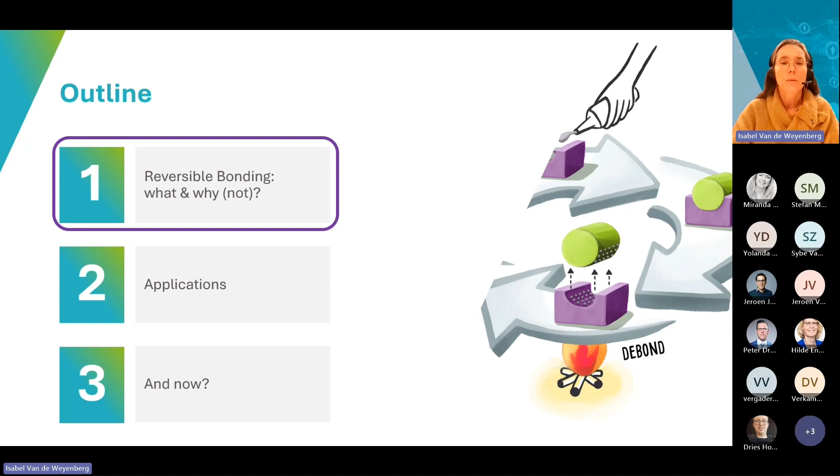So reversible bonding, what is it? First of all, we always assume that we have an adhesive joint which is intact. When there is no trigger active, the joint is still intact. We have a structural adhesive joint. At a certain moment, a trigger will become active and the components, the substrates, will come loose.

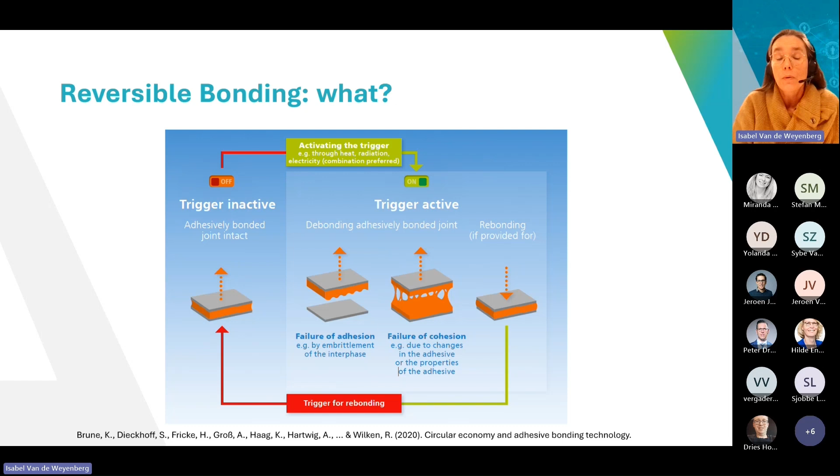Our bond is debonded. This can happen at the interface. It can happen in the adhesive layer. That's not really defined. But important is that the components, the substrates, will not be damaged during debonding. So we can rebond them if we would like to do it afterwards.

And why would we apply reversible bonding? Well, it would make the repair of a product maybe a little bit more easy when you can decompose your product and repair the components. But it's also quite interesting if you can reuse some high value components. For example, at end of life of a product, there might be one or more components inside that still have a high value and that you want to

reassemble again, reuse again. But also during your production process, maybe there is a misalignment, a misassembly, and you want to reuse some of the components. And also don't forget at a real recycling at end of life, it's always good to upgrade your waste stream as much as possible. So if you can go to recycling of individual components, it's much more interesting to do so. So these are just some examples where we could apply reversible bonding.

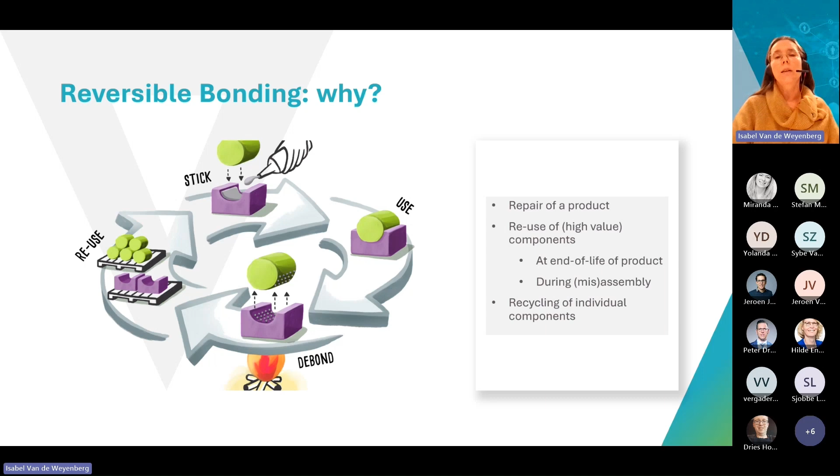But there are challenges, of course, as well to reversible bonding. First of all, from a technical viewpoint, we should be sure that the performance of our adhesive is still good enough from a mechanical, physical, chemical point of view. And also that the trigger will not happen during the lifetime of your part.

From an economical viewpoint, we have an extra cost for implementing this technology, and you have some equipment investments to do, but there will also be a switch cost involved. Your process will change, your adhesive recipe will change, and also really important, your business model. That's not always so clear. Sometimes there are split incentives. Your investment, for example, is done by a production company, but your return on investment, that's something for the recycling company. So this should be really cleared up front and analyzed very well.

And also maybe environmental viewpoint. We always think it's much better to use reversible bonding, but is that the case? That's still a question mark, something interesting to be analyzed.

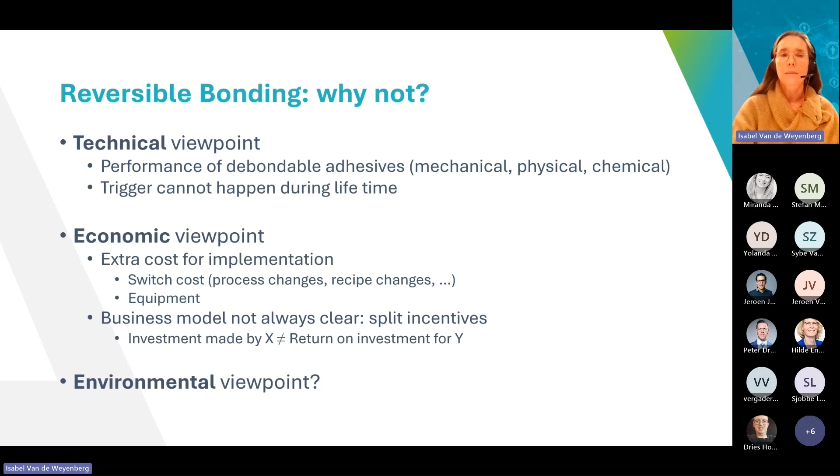So within reversible bonding, everything starts, of course, with a successful debonding. And how can we achieve debonding? Well, we identified three main categories. First of all, we have our mechanical way of working, which is quite straightforward, not so innovative. You just cut your sample or you tear them apart. If that will do the job for you, that's fine, but you have to be sure that your components will not be damaged, of course.

Quite often your part will be a bit more complex, the situation will be a bit more complex, and then your thermal triggers might help. So you apply temperature to degrade your adhesive properties in such a way that you can debond your components easily. And you could also apply electrochemical triggers, for example, electricity or UV light to degrade the adhesive and to debond your components. That's still lower TRL research, smaller scale examples that are existing over there.

Within Flanders Make, we mainly have expertise in the thermal technology. So this is really high TRL research, and we also work with thermal expandable particles, which I will explain on one of the following slides.

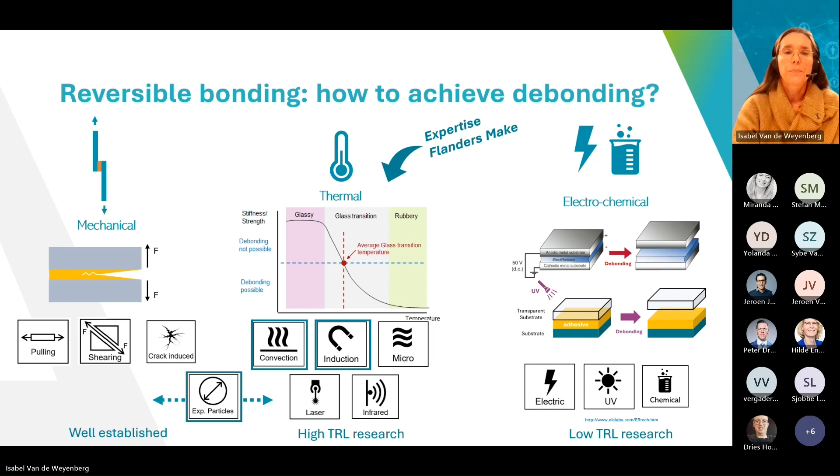So when we look at some real-life applications, some demonstrators, first of all, I want to explain a little bit the technologies that we will use. First of all, the induction technology. With an induction technology, we apply an electromagnetic field onto our components, onto our part. And if your substrate materials are not conductive, we can apply ferromagnetic particles to mix in our adhesive.

And under an electromagnetic field, this adhesive will heat up in this way, will cure, so your bond becomes intact. It can also happen very fast. I will show this later on. And in the same way, we apply again an induction electromagnetic field. We can reheat our samples in such a way that we reach the glass transition temperature and we can easily debond our parts again.

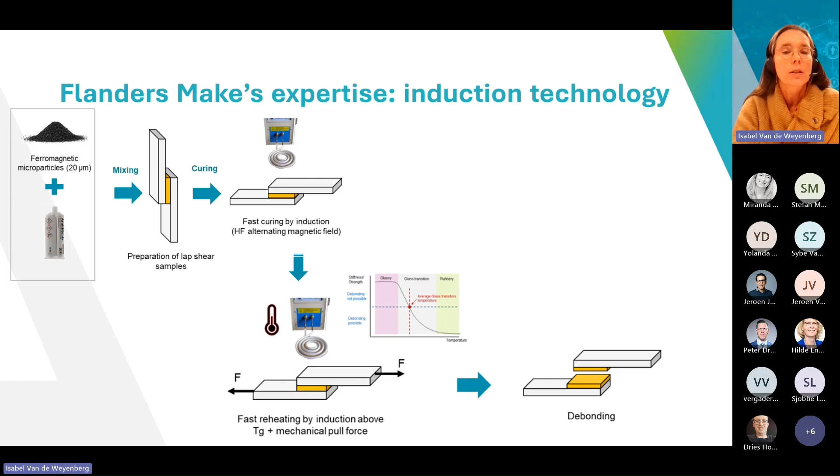Like I said, we can enable fast curing with this induction technology, which is of course a really nice extra. So it's not only about debonding, but also about fast bonding. What you see here on this graph, the vertical axis is a measure of the lap shear strength, which is also indicating the curing degree.

The blue bars are a commercial adhesive mixed with about 16.7% of these ferromagnetic particles, and the green bars are mixed with 30% particles. On the left-hand side, you see a standard oven curing. So the parts need to be cured in an oven for 3 hours at 80 degrees, and you can achieve a similar strength with only 15 minutes under induction heating. So you can increase your speed from 3 hours to 15 minutes.

And when we look at the debonding possibilities, this is now another sample than in the first graph. When we have a fully cured sample, if we put it in an induction field for only 2 minutes, you see that you can decrease the strength below 1 megapascal, and that's the strength with which you can just tear your parts apart with your bare hands.

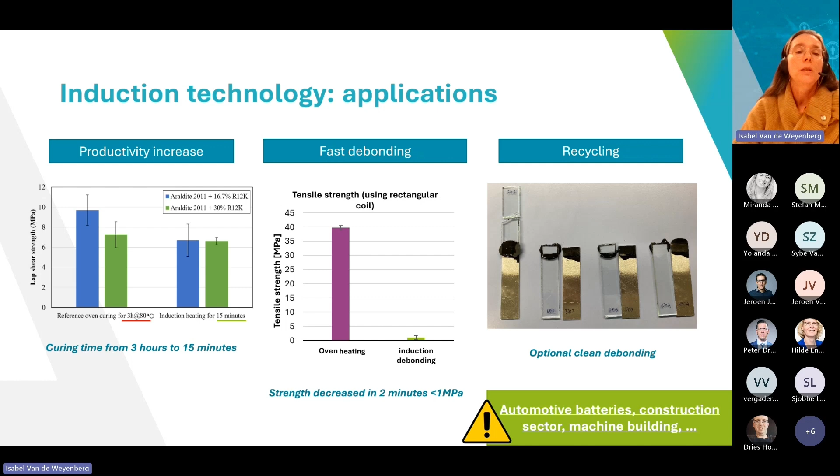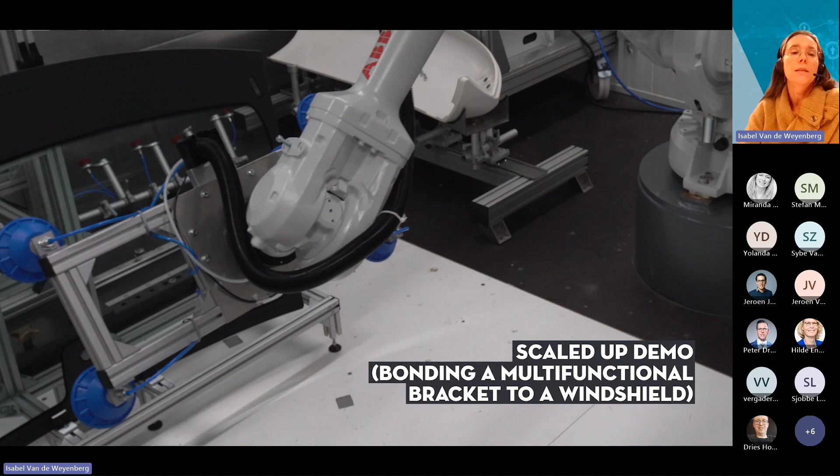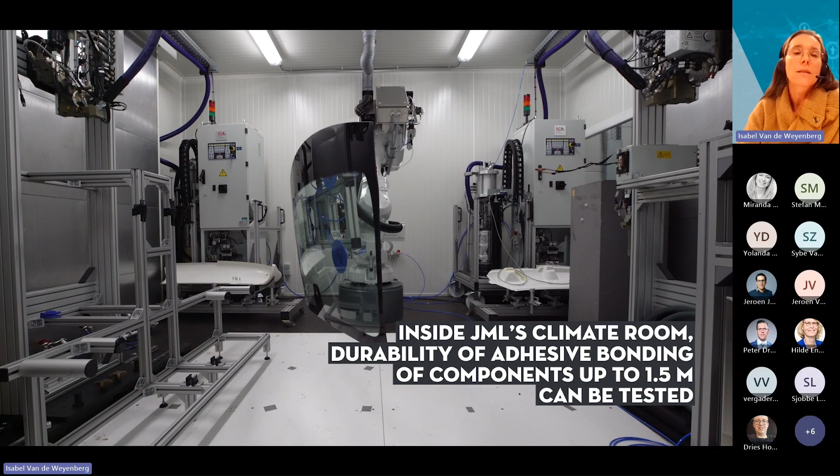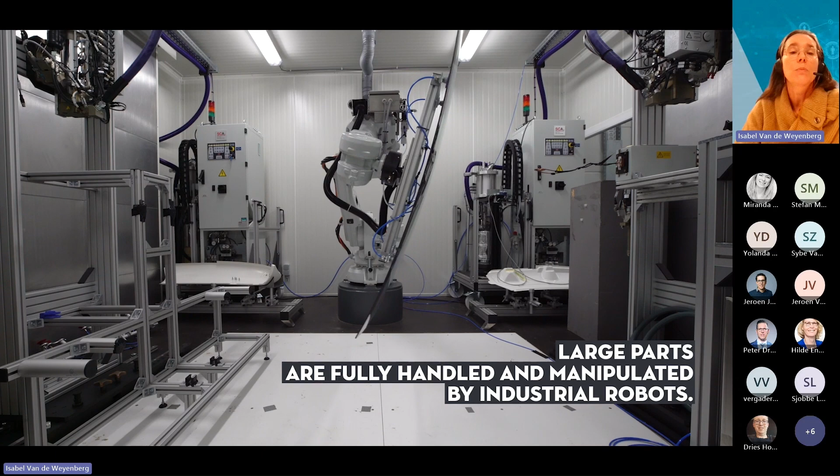And I have a short movie illustrating the fast curing possibilities here. What you see here is a robot that's handling a car windshield. On these windshields, nowadays sensors are being applied, for example, rain sensors. The robot is offering the windshield to a manual operator in this case, but this could also be another robot, of course, that will be applying the glue. So here you will see manual application of the glue mixed with these ferromagnetic particles.

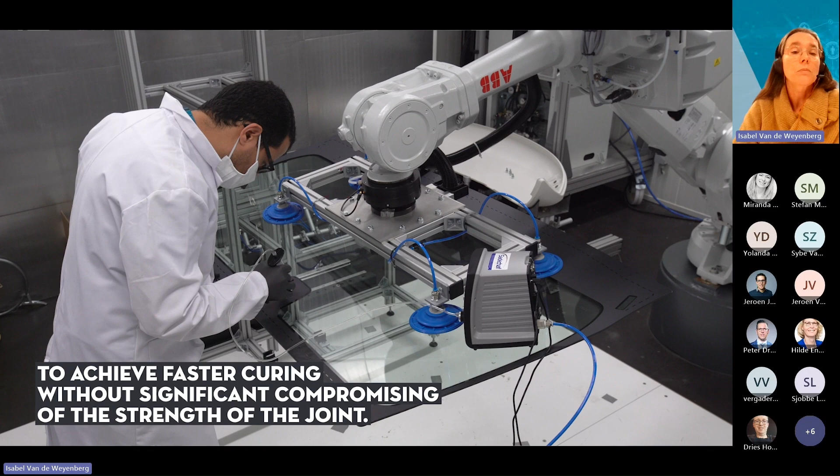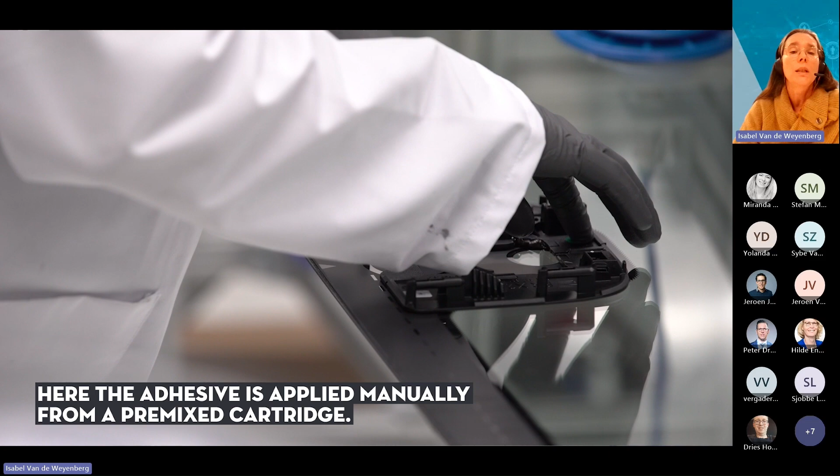A nice thing of this example is that in real life, these windshields are quite often cured for several hours in a separate stock location. So you need to have enough surface to stock your windshields during production. With this technology, you will see that just within a couple of minutes, you can already secure your sensor. You can bond your sensor to your windshield and your production process will not be interrupted.

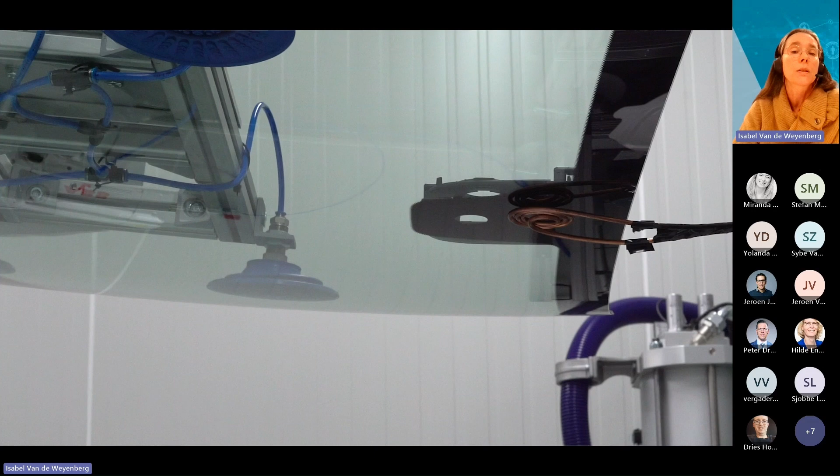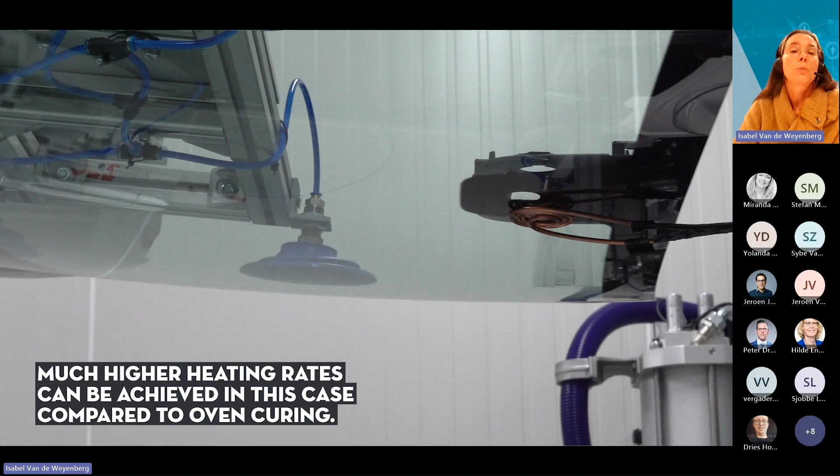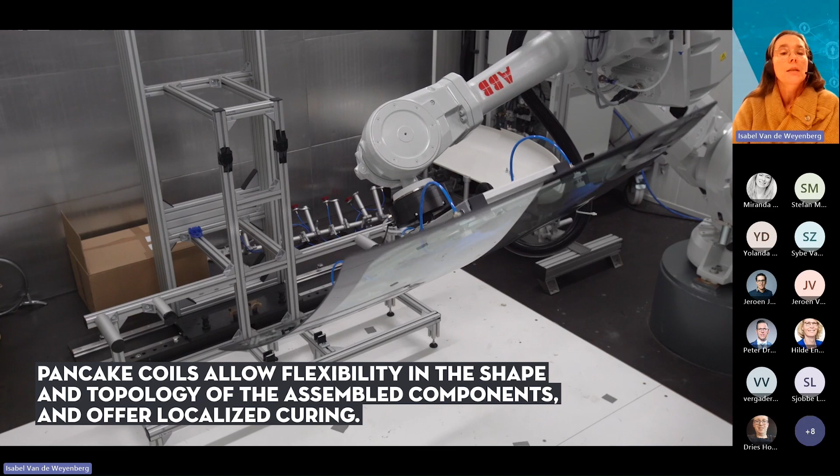So what you see here is a pancake-shaped coil that's hovering over the part that needs to be bonded. And after really a short time, we can put the windshield in a straight position again. So you see that you can speed up your production process very much.

Another technology is the technology of the thermally expandable particles. These particles contain liquid hydrocarbon. At a certain temperature, this liquid will change into gas and the particle will really expand. That's something that you see here on these photographs as well. If you mix these particles in your adhesive, your adhesive will start to swell and will push apart your adherends and they will come loose.

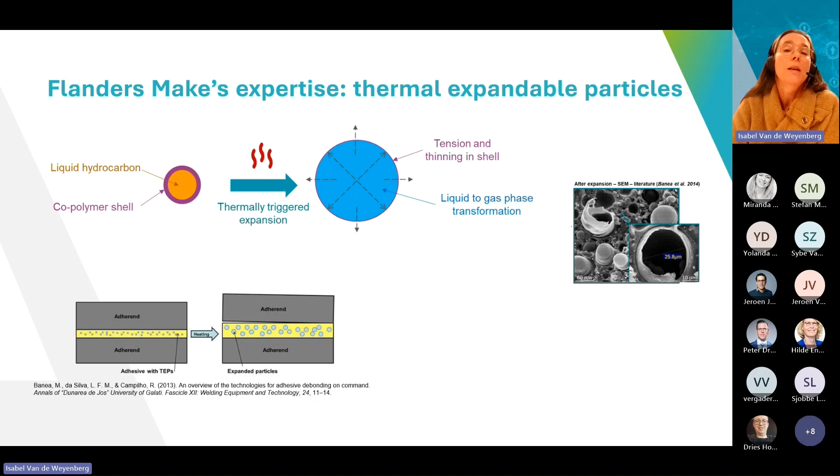In the next slide, you see also a nice example. We have a spherical glass lens, which is mounted on an aluminum carrier ring. When we put the complete part in an oven at 120 degrees for about 10 minutes, this is what's happening. We see the foaming of the adhesive. I will stop the image now. You see the adhesive is really foamed up.

It's pushing apart the parts, and it's a really brittle and foamy substance, so you can just wipe it off with a cloth. So you don't have to scrape off your adhesive. It's not really fixated to your substrates. It's easy to just clean and wipe off and then prepare the substrates again for rebonding if you want to.

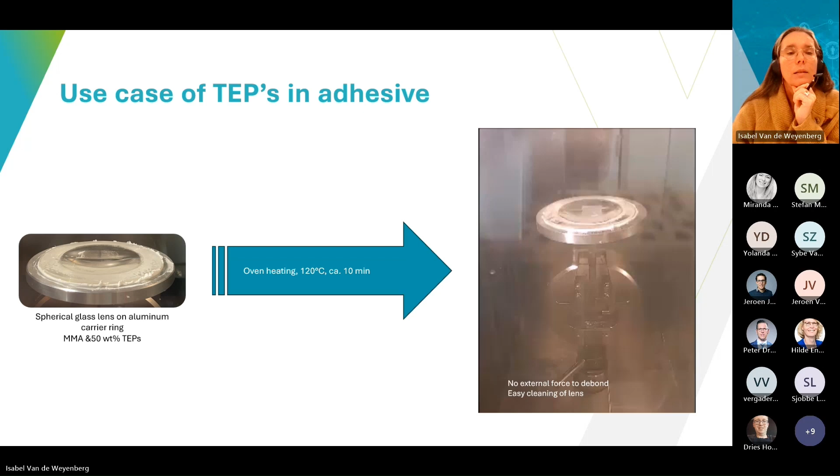Now, we wanted to scale up these examples a bit, and therefore we went to an industrial automotive example. In this case it's part of a bus chassis, but you could also apply it on a sidewall of a trailer or a train carriage, for example, everything where a metal chassis is bonded to a composite side panel.

This was an exercise that we made together with the colleagues of VITO. We took the technical challenge, the colleagues of VITO took the economic and environmental analysis, and we got our materials from VDL Bus Company. In this particular example, we wanted to avoid production waste due to misassembly.

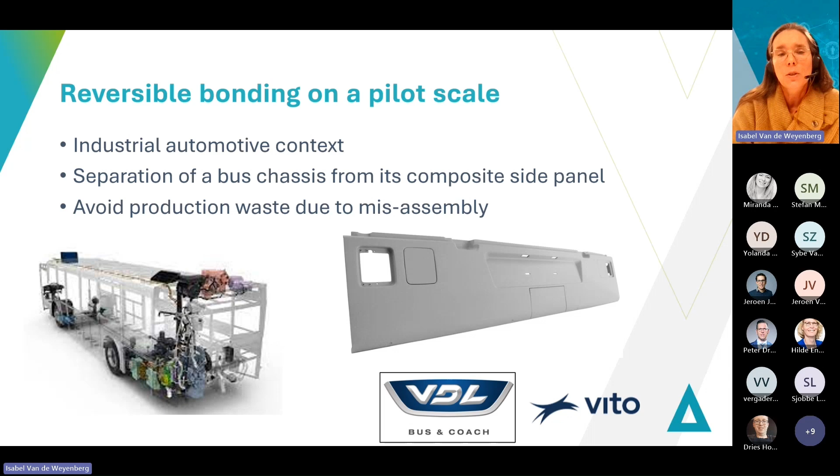You have huge panels that need to be bonded in a production process, and sometimes a misalignment occurs. If you want to debond your components, your composite panel quite often gets damaged. So this is something that we want to avoid by using this reversible bonding technology. First of all, from a technical point of view, we start with a lab scale experiment, and we wanted to obtain debonding through induction heating, because the steel chassis allows us to use induction heating in a very easy way.

And we use some thermal expandable particles in the adhesive layer to make the debonding much easier and more rapid. We have to make sure that the temperature of 140 degrees is not exceeded, because otherwise the composite panel will start to degrade. And also the debonding time should be limited to a maximum of 15 minutes to avoid degradation

of the composite panel. And we've seen that only with 5% of TEPs mixed in adhesive, we could reach a really nice result, which I will show you in the next video. And this 5% will also allow us to work with adhesive viscosity, which is almost normal compared to the normal recipe.

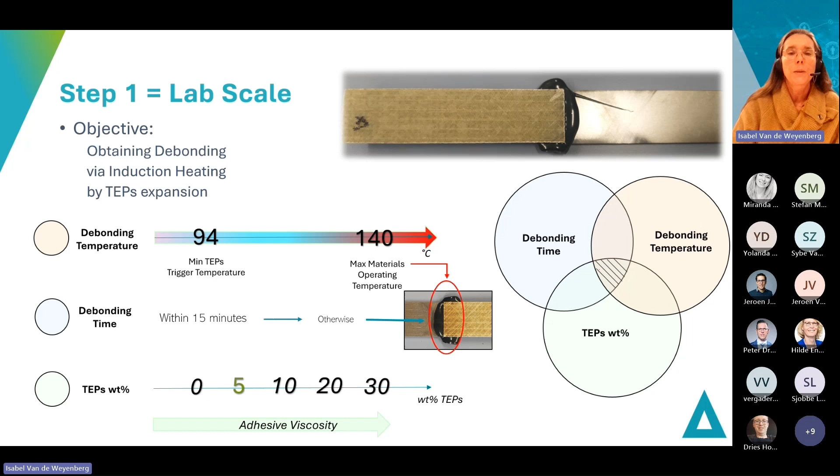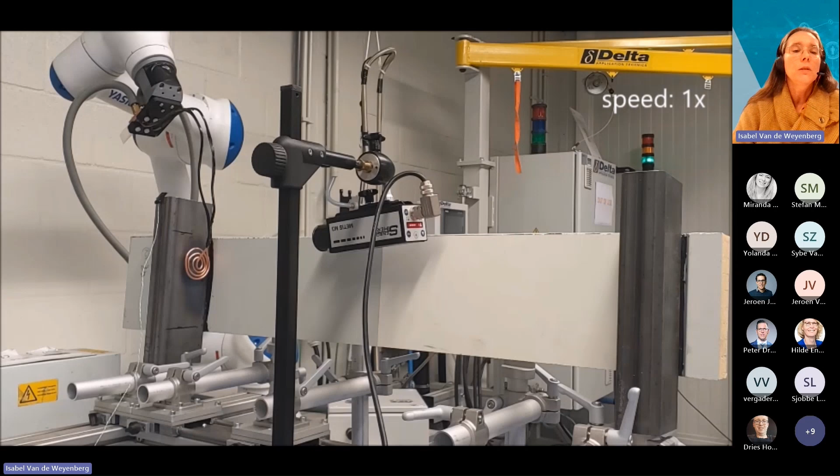You see the induction coil moving. We are speeding it up a little bit, but in a total time of about 10-11 minutes, we will reach just spontaneous debonding. It's also, of course, due to gravity that you will see, voila, the panel will just drop down. So the heat is delivered through the steel chassis towards the adhesive bond line. So from a technical point of view, we managed to show the feasibility of this technology in this example.

But what about economic and environmentally seen? Is it still also feasible and interesting to apply this technology? So if we just from a very logical way of thinking, we say, well, environmentally, we avoid primary production of a composite panel. So it's a positive story. And from an economic point of view, also there, we avoid an extra composite panel to be produced. We have an optimized production process. So also there, we expect some positive results.

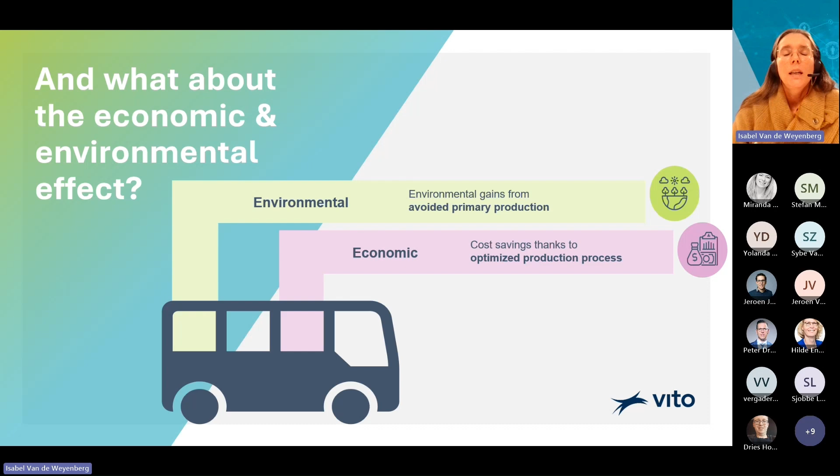The colleagues of VITO did a very complete analysis. I will show you just the conclusions in this presentation, but we've seen that the debonding process performs significantly better than just disposing a composite panel. But if you look at the total vehicle production, then the effect of this reversible bonding on the composite panel is negligible. There are much larger environmental effects, for example, the production of the motor, batteries being used, etc.

From an economical point of view, well, there were really important cost savings to be done. These cost savings, they were driven by the debonding equipment costs, of course, the value of the component that can be reused. So in this case, it's the composite panel, and also the frequency of the error that's occurring. Is it occurring quite a lot or just a few times? That will also be important for your economic story. So we've seen some really promising results for applying this technology in an automotive assembly, but you have to realize that these results are really highly case specific.

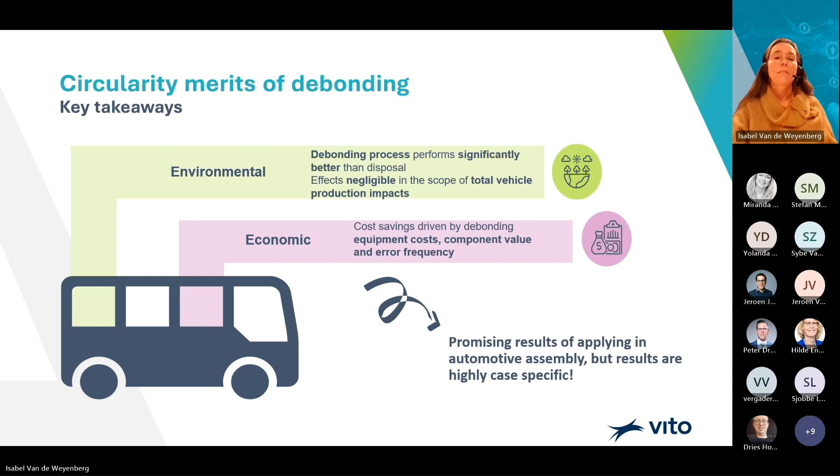So some key takeaways of all these examples. The high TRL technologies for debonding on command, they do exist. I demonstrated them. So we have seen some examples on the use of induction for fast heating to enable bonding and debonding. And we could also use particles in this process. Each application will require an optimized recipe for your adhesive, your particle content, your process conditions. So from a technical point of view, an optimization is needed, and also from a business point of view, it's really requiring a good and thorough analysis.

Look at your environmental story, your economic story, and don't forget to inform and align with all your stakeholders involved within your company, but also externally. Otherwise, there might be some issues popping up when it's already a bit too late. But from my part, I think this reversible bonding technology, it's really a fact. It's not a fantasy. We can already apply it in a high TRL example. So it's ready to be implemented for sure.

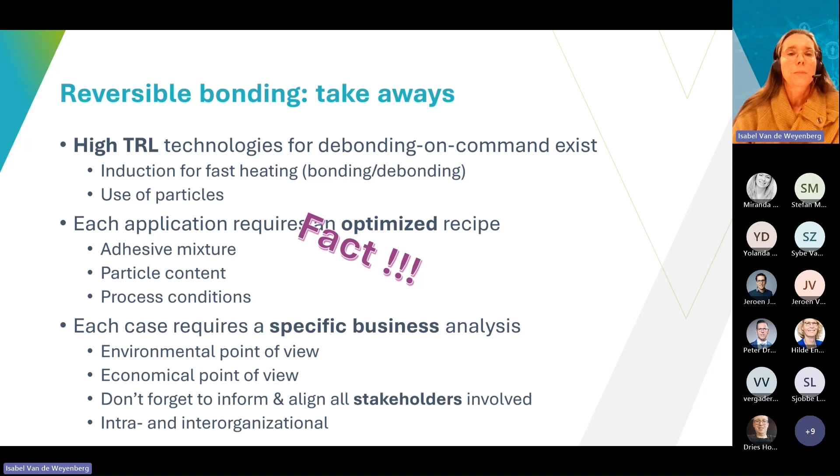Further ongoing things, public research that's ongoing within Flanders Make. We are active in a project on the use of nanoparticles in polymers and in adhesives, which might optimize the performance of our adhesives as well. We are also active in European projects, one on the use of biodegradable debondable adhesives and one on the use of smart and digital tools, for example, also on debonding on command.